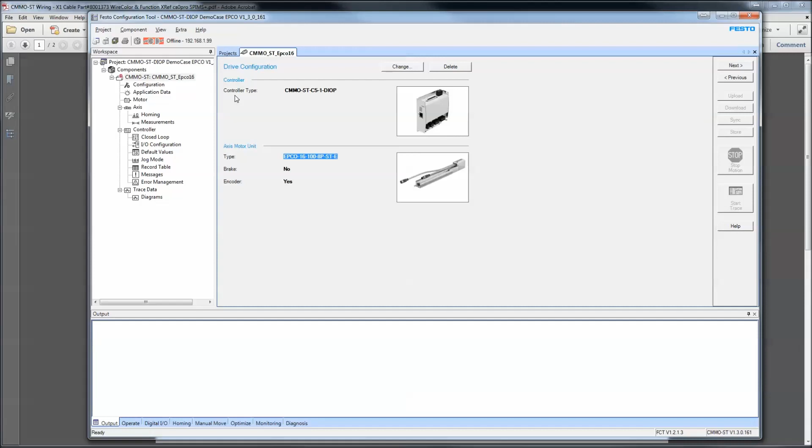Okay, today we're going to be talking about a CMMO-ST controller. This particular model is a DIOP, which is an I/O controlled drive, and we're going to be using an EPCO 16-100. 100 is the stroke, 16 is the bore size, and we're going to be using this particular device in binary profile. There's two different distinct modes.

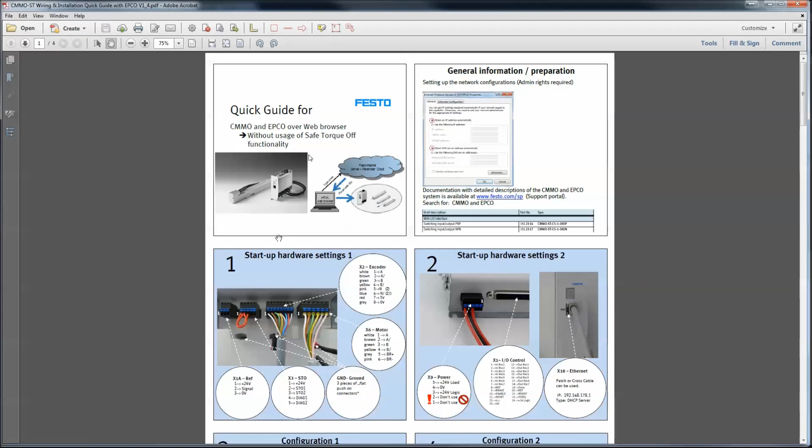And before we can do anything, we need to make sure that we're completed with our wiring. So this document here is available on the website of festo.com under downloads and support. The first thing you have to establish is the wiring for the STO connector. That is the safe torque off.

Okay. The other two cables here, the encoder and the motor, these are pre-manufactured cables. They should just plug in. You may have to terminate the actual wires at each connector, but the wiring here is shown as color coding goes, as well as in the manuals.

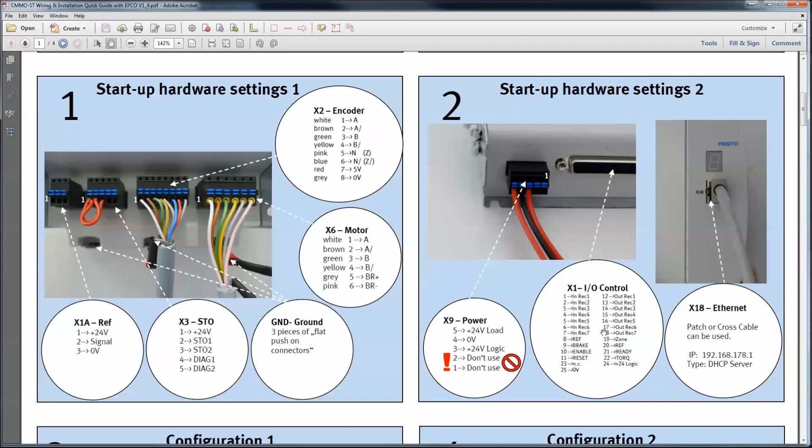Step 2 here is on the other side of the controller. We've got a power connector, and that is to provide logic for the controller and load for the motors. And the X1 connector over here is where all of our I/O for control of the axis is considered. I'm going to close this document now. I don't need this anymore.

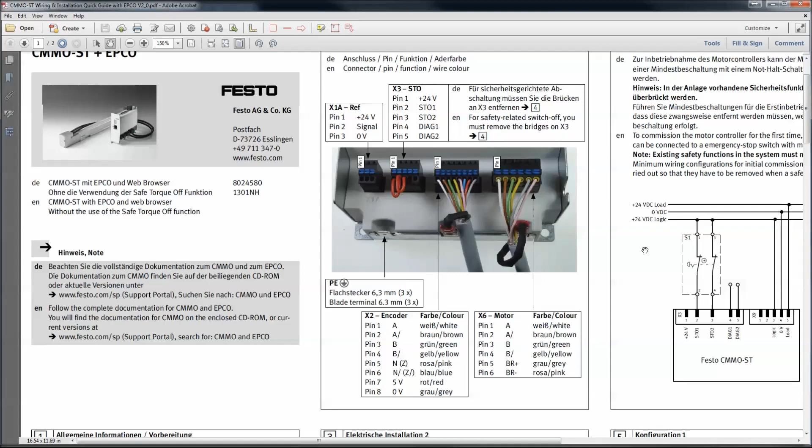The next document is again on the website of Festo. A little bit different representation, but again the same 2, 3, 4 connectors. You've got the STO and you've got your encoder and motor. A couple pinouts for color coding. The STO, all this is a way to bring 2 channels of safety into the circuit of the controller. Here is a sample right here of an e-stop.

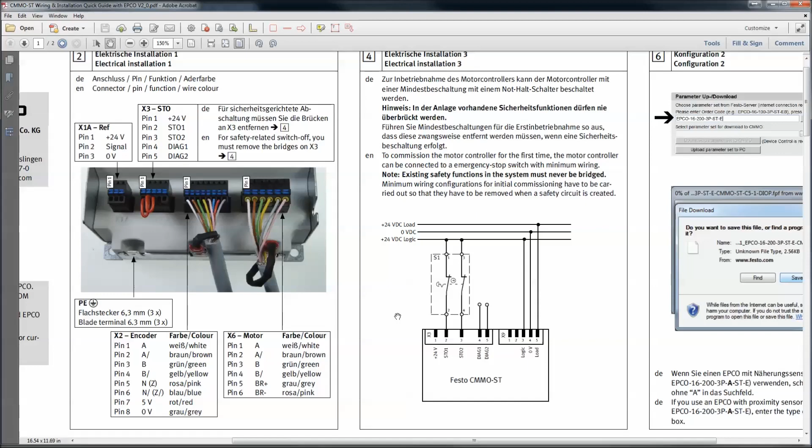You're switching 24 volts into here, and these have to be held high or turned on or have 24 volts applied in order for the power stage or the intermediate circuit to be able to be turned on via the enable signals. The opposite side again is discussed.

We've got the I/O control connector, the X1 connector, and we've got our power connector, which is again our logic and load. And then we've got our Ethernet connection, which comes DHCP enabled. If you have multiple controllers, then make sure that you commission one at a time and turn off the DHCP server so that it can be on your network without communication issues and conflicts. You can only have one DHCP server on a network.

Okay, again, we're talking about the CMMO-ST with the EPCO. For the sake of argument here, I'm going to show you how to create a new project real quick with the FCT Configuration Tool from Festo. Simply create a new project. Click OK. Select the controller. This is important here.

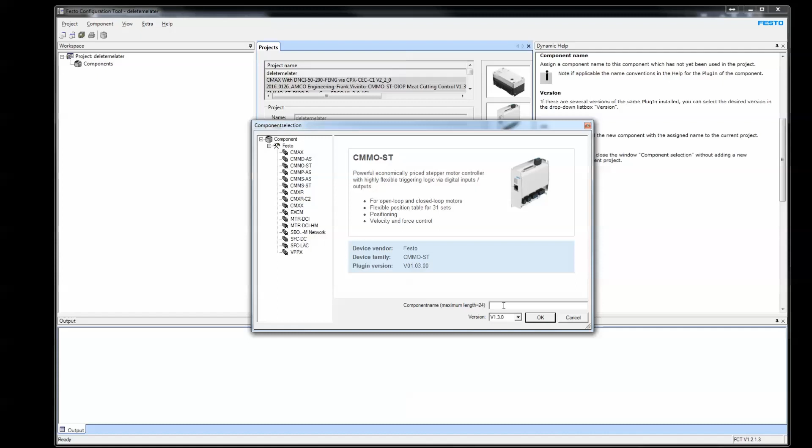If you're trying to do an upload and you don't know what version you have, you might have to go to older versions. You have to create a shell first before you can upload. But for today's purposes, we're going to click on the latest, which is the 130. The 140 is a beta, so don't think that you have something or don't have something I have. Give the axis a name. Click OK.

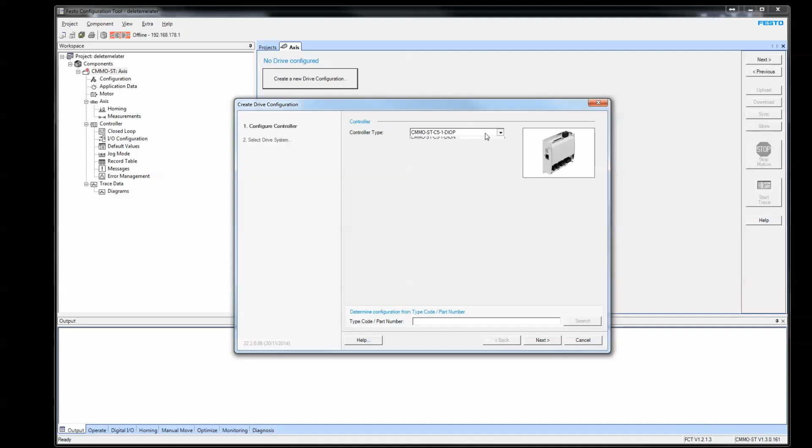At this point, you create a new configuration. This help right here is very important for newbies. You can turn this on or off right here under Dynamic Help. I'm going to leave this off, create a new configuration, hit the next button because this is the default. Could have an NPN instead of a PNP. Festo motor with axis.

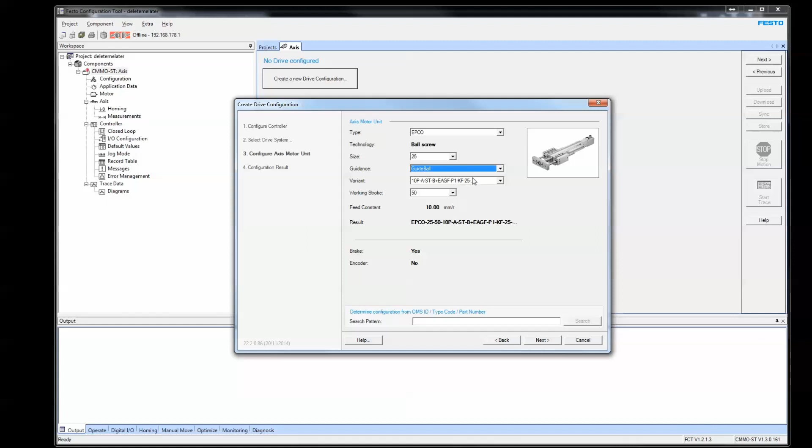EPCO, give it a size. Give it a stroke. Then you get the axis and it will create a shell. That being said, you're not done at this point because you still need to go through each page and set up various things. So I'm going to delete this project and close it and go back to my already existing project here.

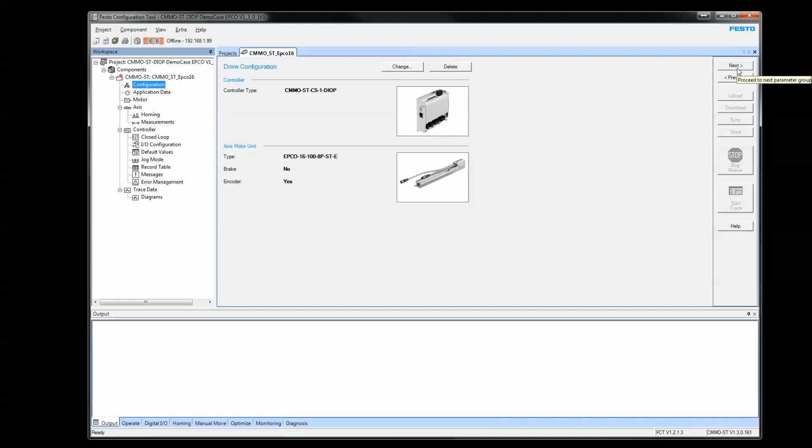So at this point, I recommend everyone use the next and previous buttons over here. You're at your start page, hit the next button. Again, I am discussing binary profile only in this particular guide here. I turn on a record sequence so that I can link records, which we'll discuss later, and then I have a couple comparators here that we may or may not use. It doesn't hurt to have them in the project.

Hit the next button. Extremely important, all the gains are based on the load that you have. So 2.5, 5, whatever you have for a load at the end of the cylinder attached here, that's what the load is. So again, if you change this, hit the next button, this right here, read it. It says the load's been changed. You want to reset all and recalculate the closed loop settings, which are the gains. Closed loop settings are right here, but we'll come to that after.

So over here, this is something that you typically don't edit. You could edit it if you really want to, but we're not going to. This right here is something that's of importance. The quick stop is a standard deceleration rate for faults, e-stops. Well, depends on what kind of e-stop it is, but typically you want to set this up for your application. The limitations up here are just limitations that the project will consider later as defaults.

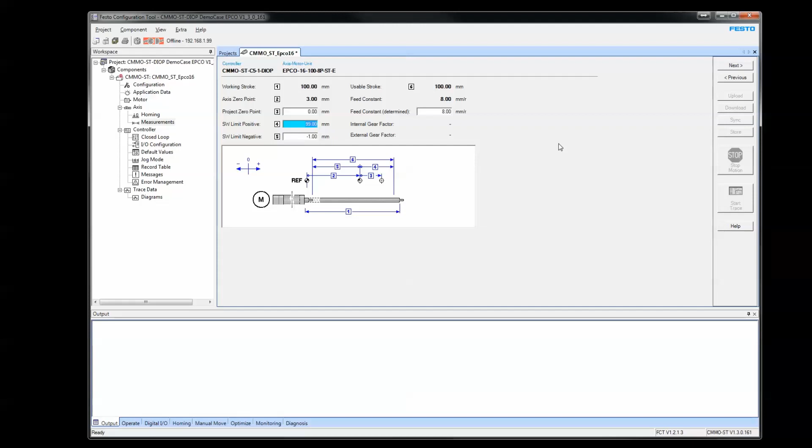So when you get to the measurements, 100 millimeter stroke, we know that there's theoretically 3 millimeters behind that 0 reference, but I'm saying that the software limit is -1 and 99. But in theory, the axis might only be able to achieve like 97 because it's only a 100 millimeter stroke, and we've already used up 3, and you do the math. I'm sure you can figure it out.

The next button, this is because this is only available after you've been online and saved the project. It saves this and stores this offline. These are standard settings. You don't need to change these at all. The gains should have been calculated automatically. If you don't feel that they're worthwhile enough, you can enable editing, modify these yourself. You could calculate them a little harder, and it'll modify these to suit. I'm going to keep where I had them.

And then there's only 2 outputs that are physically able to be configured. You have a variety of things here. In my case, I don't need this for the time being. And then we have some default values. For this particular application, it's important. I've opened the windows up to the stroke of the axis as far as following error goes, because I'm going to be doing some position moves and possibly encountering opposing friction that may stop things, and the axis will not be reaching its proper destination in time, and then you would get nuisance following error. So I've opened these up for this case.

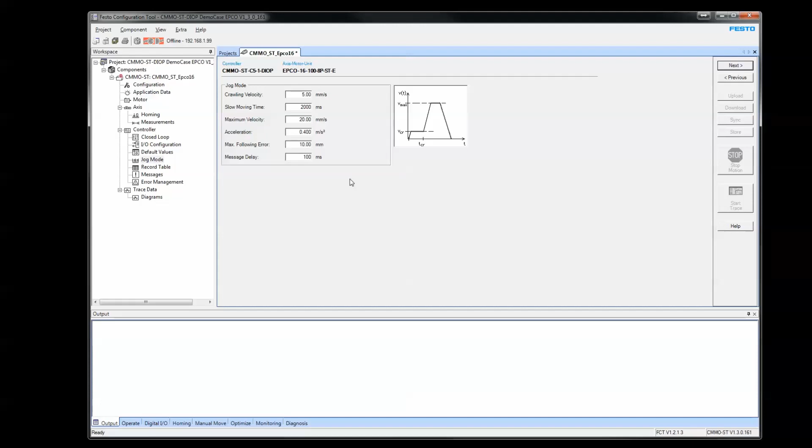These are some default jog modes. This just means that when you press the jog input, it's going to go with the crawl, wait 2 seconds, and then go to a different ramp speed. If you don't like that, you can change this to the same 5 or whatever you want to do here.

Then we have our record table. The record table is where you set up records to do a variety of things. In this case, as I said earlier, we're going to extend the axis out. We're going to limit the amount of force, and when we reach our target, then we will return home. So in this case, I am using these moves right here to do the job.

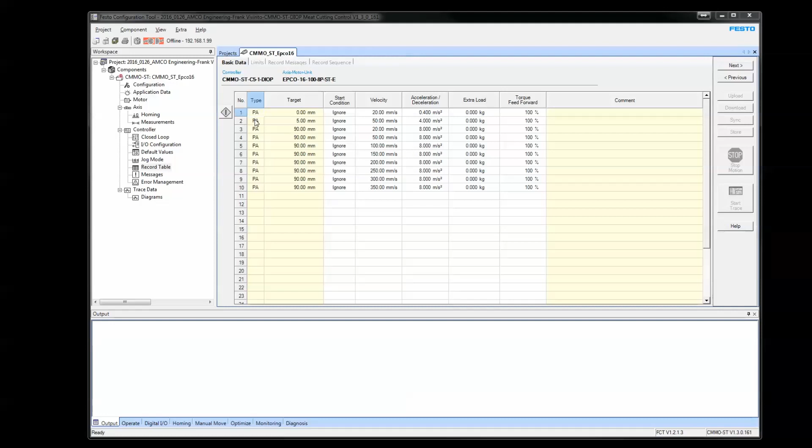Okay, I've changed projects here just to get to the right record table. I didn't have the right record table. So if we go back to our dynamic help, you'll see that when you're in here, these moves here tell you what they are. If you double click on the record itself, you get a full overview of what each record is. When you click in the fields on the right hand side, it will provide information regarding the moves.

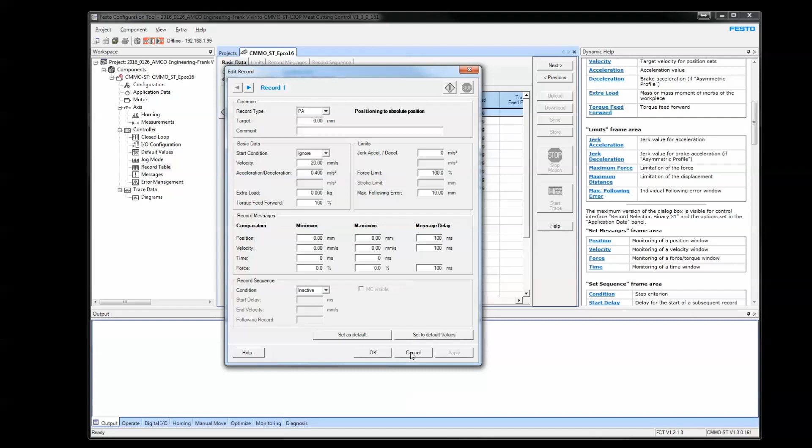And as I explained earlier, what I want my application to do is extend to 90 millimeters, and we are going to modify the velocity for each move. You'll see here that the velocity is the only variance here. I'm going to provide a force of 20%, which is based on current. My following error is 100, so that it doesn't provide an error. And when the motion complete is active, meaning it's finished its move, then we're going to execute record number 2.

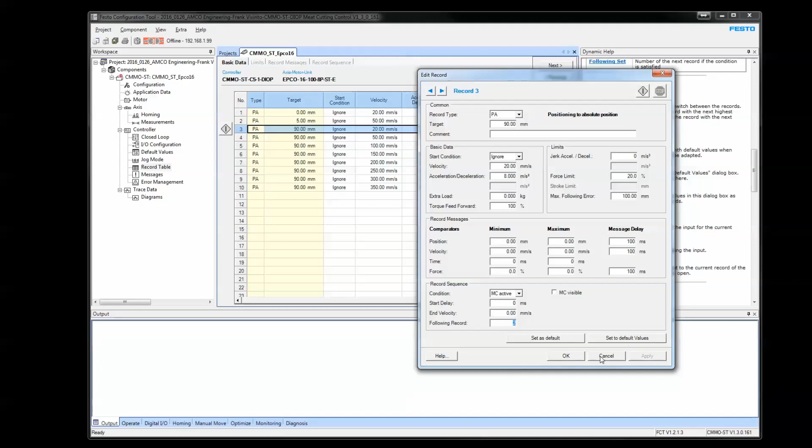And that's how each one of these moves are set up. Different speeds, so on and so forth. So, digital I/O.

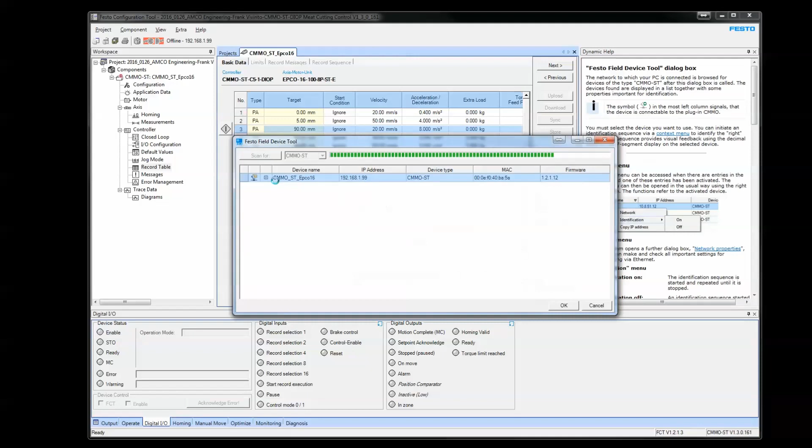Now we want to go online. First thing you do is do a scan to establish the physical connection to your controller. Hit OK, hit OK, and now we're able to go online. In my case, I've already downloaded, so it's synchronized, but you may have to do a download. When you're finished doing a download, you do a store. Store. Yes. And now we see what signals we have.

So you have diagnostics here. I'm going to delete all the diagnostics. All right. Monitoring. Manual move. Okay, manual move. See how everything right now is grayed out? You're not able to do any moves right now. That's because the enable's not on. So to get the enable on, we need a couple of things.

We need the safe torque off. See how the safe torque off is off right now? I've pulled the connector out just to simulate, but we need the safe torque off to be active. The next signal is the control enable here. Okay, without the control enable, when you're trying to run with your normal I/O and not in here in FCT, if you don't have the control enable on, you will not be able to get the power stage active.

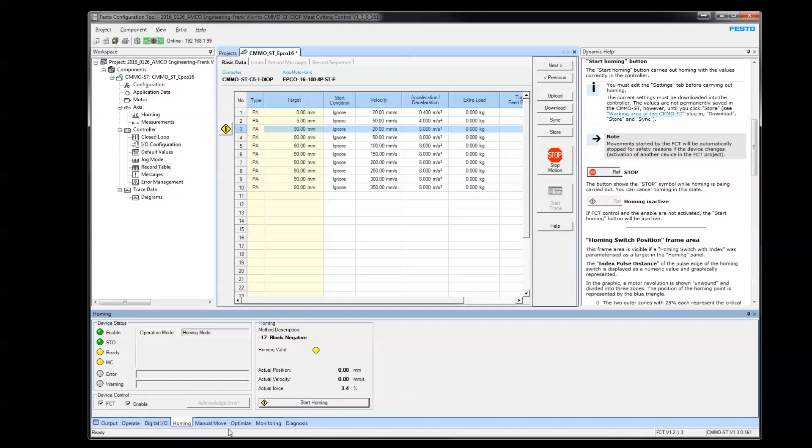It's back and forth. If you want to execute moves yourself over here, you just come into here, add the move, and run move, goes back and forth. It shows going back and forth.

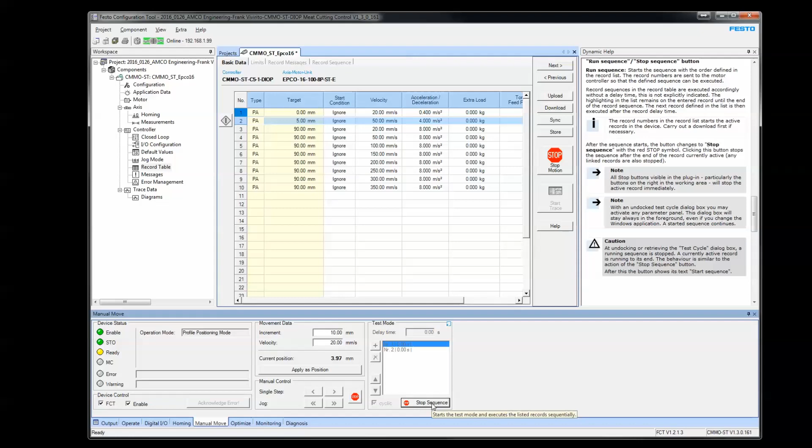All right, so you've programmed some moves and you want to execute the moves themselves. The yellow will indicate that it's been homed and is able to be moved. You press this once and it does it. I'm going to move to this here so you can see the target and the actual here. So I'm on move number 3, target of 90. It's going to move out to 90. And then when it's finished, it's going to move back to move number 2 to there. Okay.

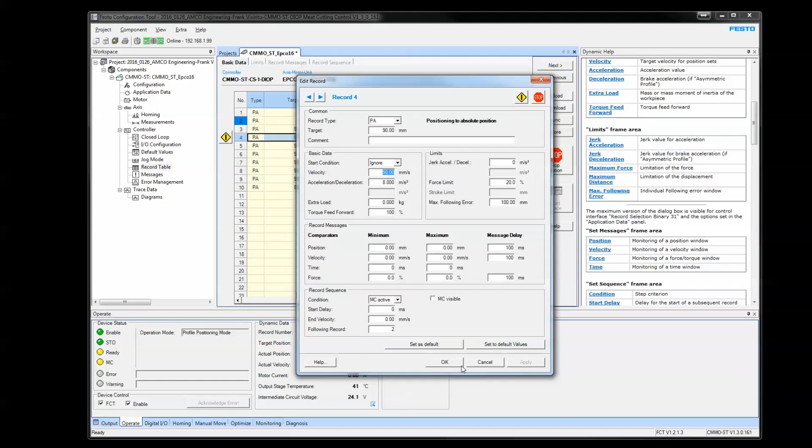The next move is just a little quicker. The velocity's changed. All the moves are set up identical except for the velocity. And you simply select a move and do it. A little quicker.

Okay. Now we're going to go to controlling this drive or controller via I/O. The first thing you have to do is you have to gain control sovereignty from this device. So you have to turn off the enable, off FCT. And for this sake, right now we're going to go to here. Right now it's not ready or enabled.

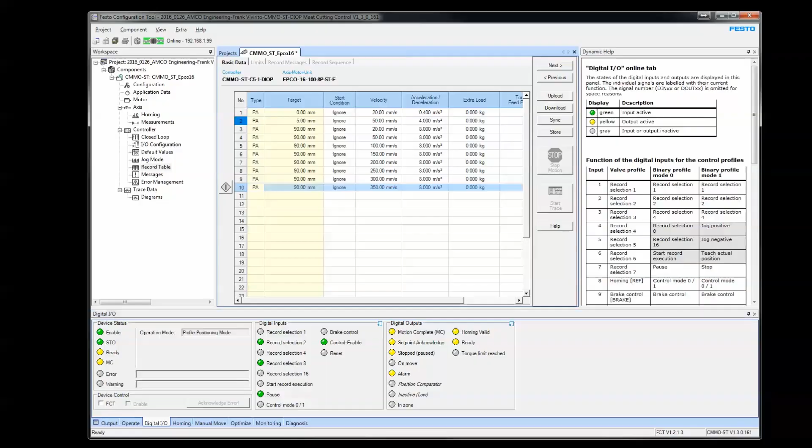The control enable, the input right here, is being turned on externally. That right there is the DIN 10. This purple wire here, DIN 10 on the X1 connector. So that's what's turning off and on right now. And the ready digital output 10 is coming back to you on the pin 21 here.

So the way that any record takes place is via the record bits here. So these, record 1, these are binary select bits, okay? So you've got 1, 2, 3, 4, 5 record select bits, which are these ones over here in the green, and they will select binary from 0 to 31 decimal. What this binary select does is it moves your pointer to whichever record you want to execute.

So if we want to execute record number 6, we need to turn on this bit here, and this one right here. So this one and no, that one there. So 2 and 4 is 6. So now, even though it doesn't show it, we're pointing at record 6. And the next bit that we need to turn on is the start. So where's the start bit? Start record execution. So DIN 6, which is the green or pin 6. As soon as I hit the start button, it will execute the move.

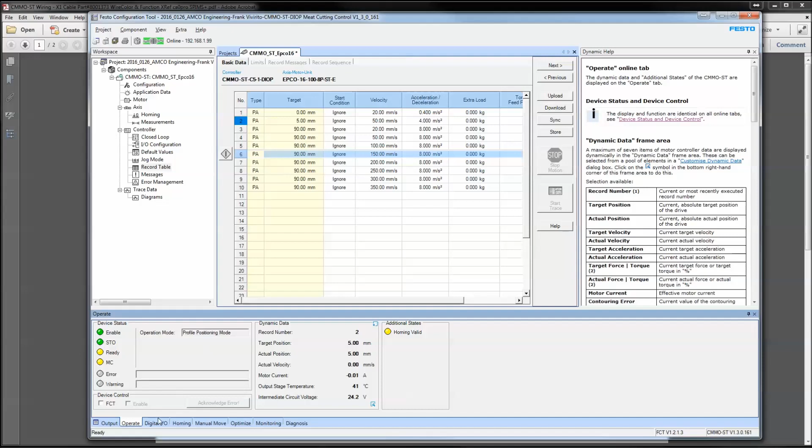Each time you want to do another move, you simply change the record. So if I turn on the first bit, now we're set up to program to move number 7, which is just a little faster here. And then I'm going to start over here, hit the start bit. And the start bit is a handshake. Okay, so when I turn the start record execution on, the set point acknowledge should come on,

and I'll do that just by holding the axis. So I'm holding the start. The set point acknowledge comes on. Now I'll turn off the start. Now it changes transitions again. We're still on the move. Now I'll let it continue. So we're executing move number 7 right now, and then it goes back.

When it's finished, the motion complete comes on. Only when the sequence of records is finished do you get the motion complete. So that's what you use to determine and get the full handshake. And that's about it for in here.

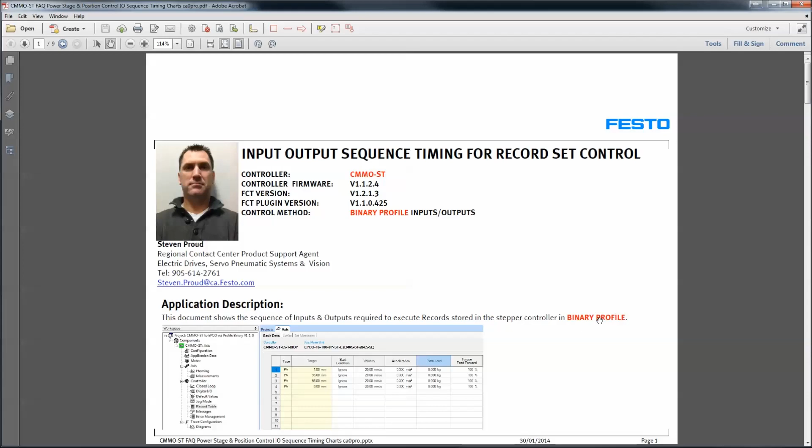Okay, the last document I want to show you here is, again, my document. I've got a couple documents here. This one right here. Okay, so this is just some sequence timing for record set control, which is what we're using, the binary control. And it shows you that we're in binary control. Talks about the digital I/O.

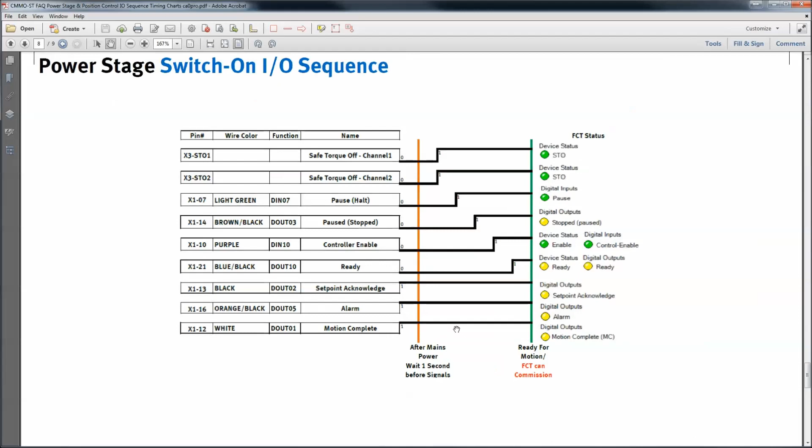Switch on power sequence. So this shows you here that your X3 connector, the STO1 and 2, need to be turned on. At this point, DIN 7, the halt bit, will be required. And maybe I didn't show that in the last video. This pause right here is called halt. It's always on. If I try to execute a command, right now I'm executing a command, and then I drop that, the axis stops. Okay, so if you want to continue, you turn this back on, and it will continue where it left off.

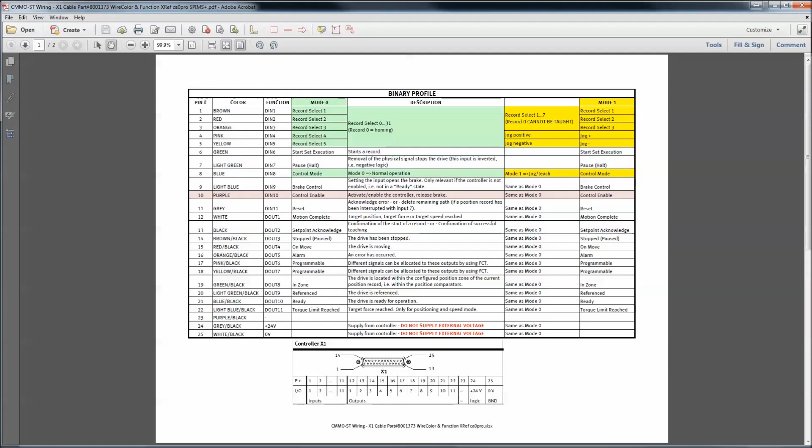But basically, this pause bit right here, which is in fact the pause halt right here, DIN 7, pin 7, pause halt, that's required to be high or on at all times for any moves. And getting back to this, the digital output 3 comes on, controller enable, DIN 10 is turned on. At this point, the ready should come back to us. The set point acknowledge is always high. The alarm, if you're using it, and motion complete will both be high.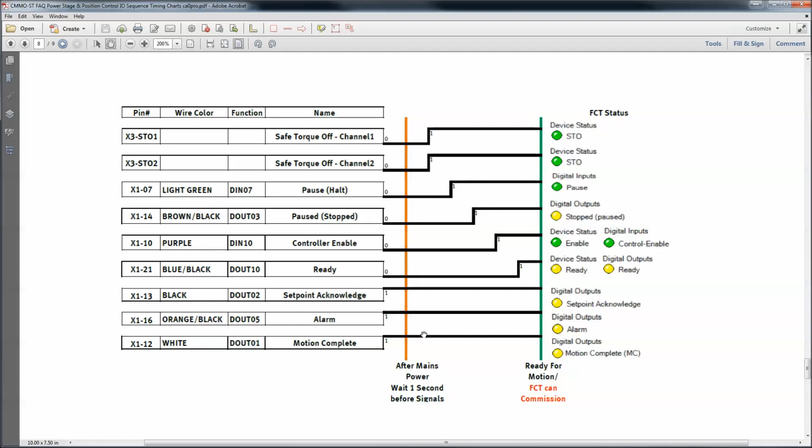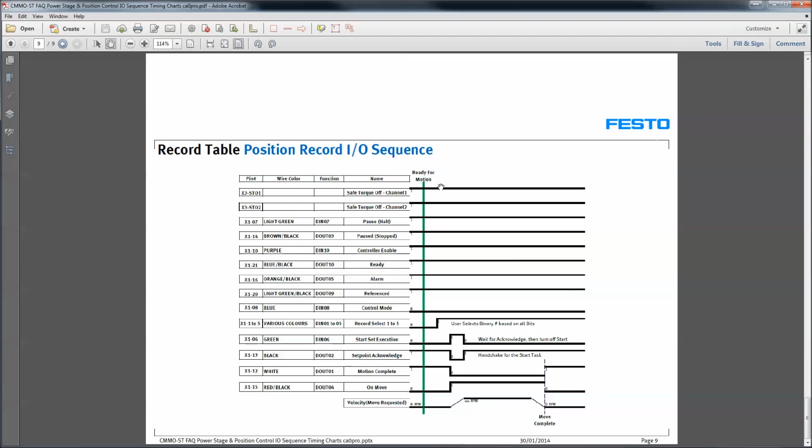And now we're ready for FCT commissioning. So these are the signals that are required up to the point where you need to turn on and execute in FCT, which is why I wrote this down here. When we're executing records, as I detailed earlier, see how much I can zoom in here. The green is where we left off on the previous page here. The record select 1 to 5, that is these record selects right here.

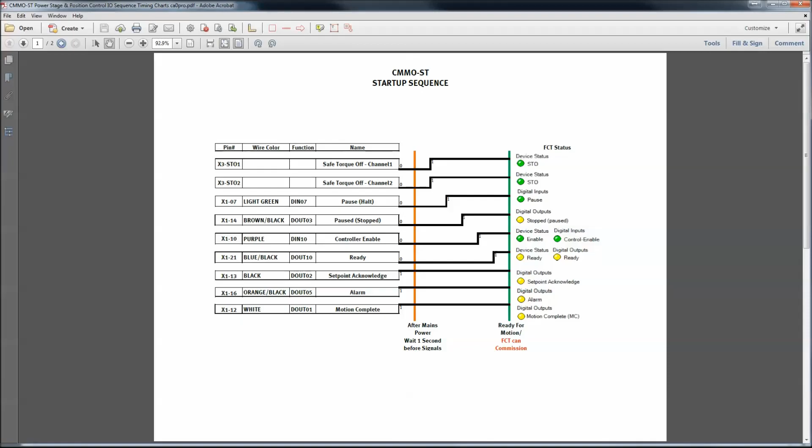You basically select a record select. The DIN 6, which is the start, is then turned on. The set point acknowledge is inverse to that, so it will go off, and then when you get the acknowledge in the PLC or your third-party device, then you will turn off the start set, and the handshake will, of course, follow that. The motion complete will go off when the move is started, and when the move is finished, then it will go high.

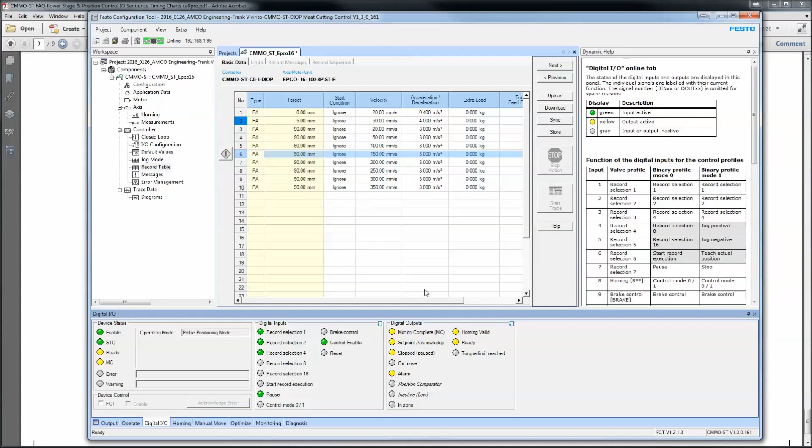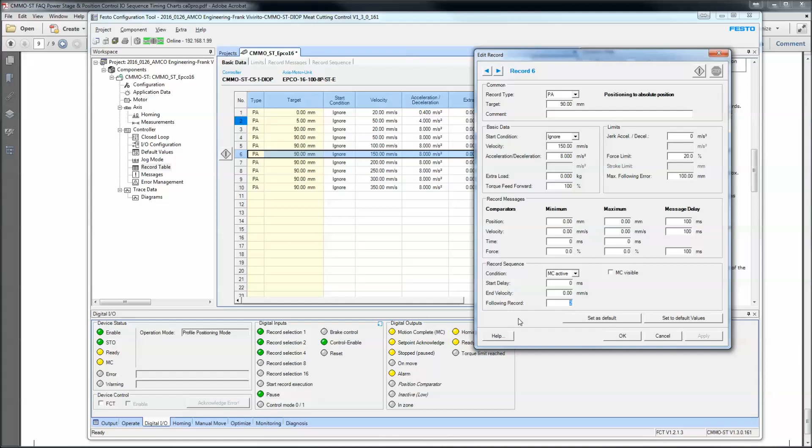In our case, in this particular routine, because we're doing sequenced record sets, we have a condition here where when we're finished this particular move, when the motion complete becomes active, it does not turn on physically at this point, this bit right here. It'll execute move number 2, and when move 2 is finished, which is the end of the sequence, then the motion complete will come on. If we in fact had, let's say, 5 sequence records, the motion complete would not come on until all 5 sequences were finished. And when the move's finished, motion complete comes on, the on move goes off, and that's it.